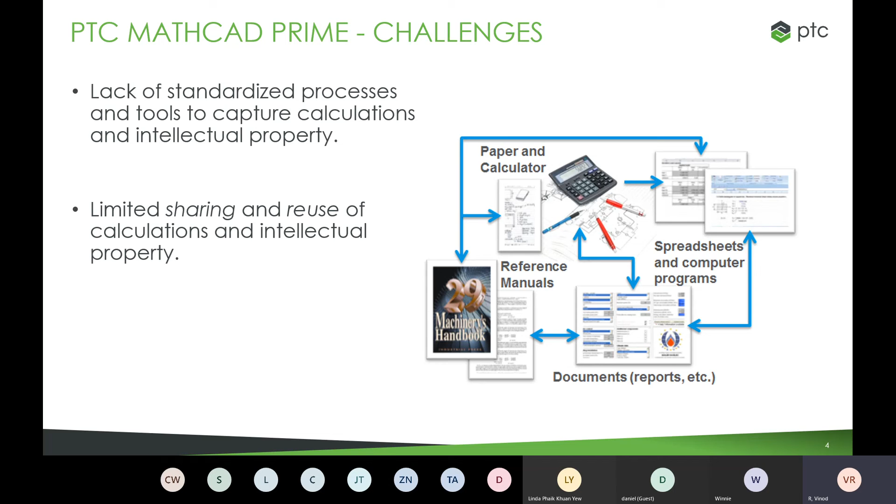And also, errors are very hard to catch when you're working on any programming or defining the problem statement in the backend. If there is something wrong, or if you make a simple mistake, identifying that mistake and where it has gone wrong is a bigger problem today, and it would take a lot of time to catch that problem and sort it out. So that's a bigger challenge today in the market.

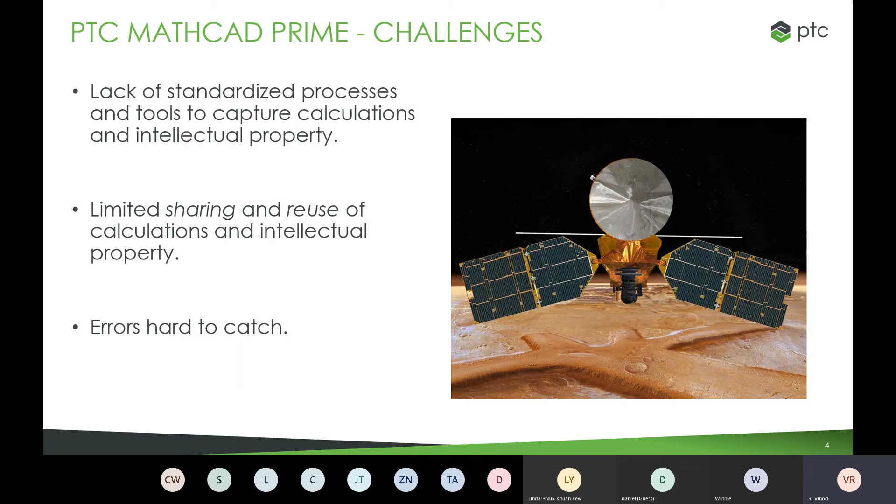So to address all these challenges, PTC came up with a product solution called Mathcad for any engineering calculation, which will help you to analyze your problems, solve them, document them, and also share them with your peers, your colleagues inside an organization, so that it makes it easier for you to help them understand the problem. It's a self-explanatory document. No need to go ahead and explain how things are done, as you would if you were doing it in programming or a spreadsheet or an Excel document.

So first of all, I'll talk about the capabilities. It's a digital engineering notebook to perform your engineering calculations and manage your design intent. So as an engineer, you are not forced to learn a programming language for any engineering problem in order to narrow down to your solution. What PTC offers is a completely whiteboard, intuitive user interface. So you can go ahead and define the problem statement as you do in your notebook or on a piece of paper.

You write your formulas down, define the constraints, then you solve that problem. And as you make any changes or an update, you can see the problem update dynamically. This is how PTC helps you to increase efficiency as well as speed up time to market by using the right solution early in the product development process.

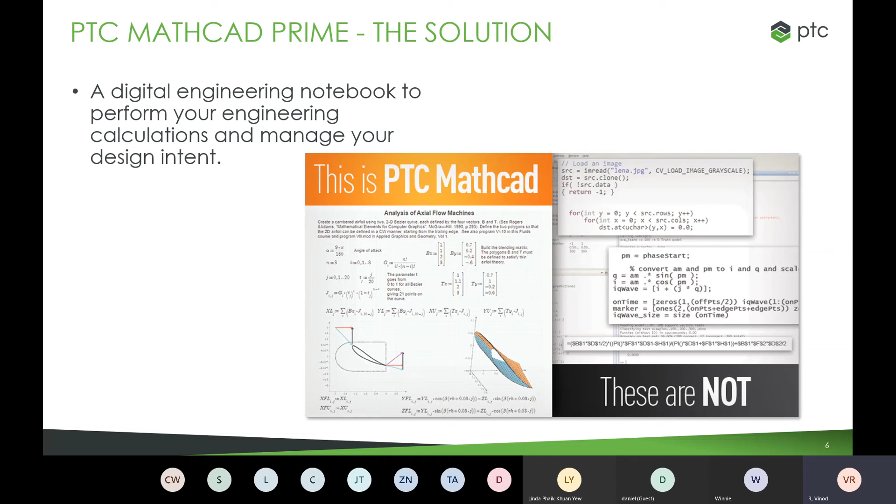So it combines the ease and familiarity of an engineering notebook with a powerful mathematical engine at the back end. And as I said, it's an intuitive as well as easy to use whiteboard with natural math notation. You can see how you go ahead and define what the X value is, what the formula is, everything as you do on a piece of paper or a notebook. So you're not doing any coding or programming, or using any spreadsheet, to bring up the relationship between the two variables.

So it's comprehensive: it combines live math, text, graphics, and programs in a single readable form, and manages units automatically. This is an added advantage. As an engineer, sometimes you might end up using a different unit system, and because of that small error, the entire problem will result in a big mistake.

So if a software helps to guide you, and also gives you feedback whenever you're putting a wrong unit system into a mathematical calculation, that will boost the engineer's confidence level, as well as help them work flexibly, and they can work confidently on a problem statement, knowing that if I make any sort of mistake on the unit system, I have Mathcad, which will highlight that this is not the unit system or variable you are trying to bring into a formula, and this is wrong. So that gives an added advantage when you use our Mathcad.

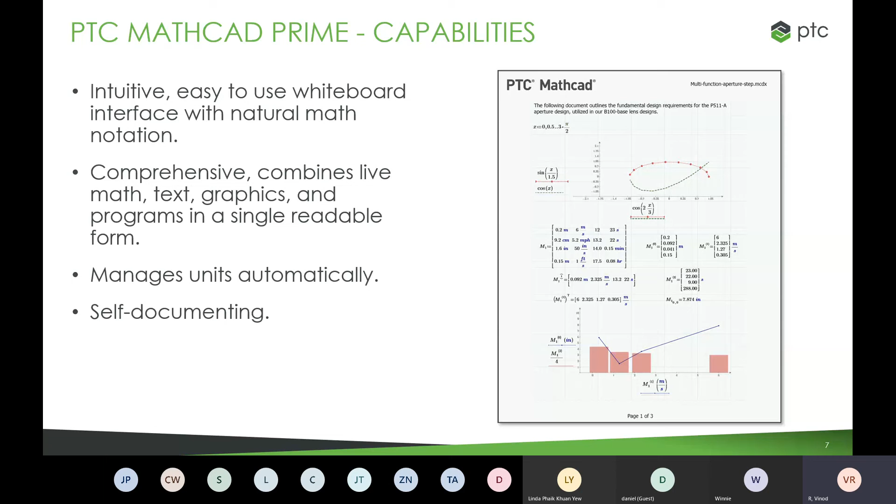As well, it is self-documenting. You define the problem statement and when you export that, whenever you want to share it with your colleague, you can do that within no time. So it's a what-you-see-is-what-you-get editing document, and you have a rich numerical function library. I'll walk you through that in a live demonstration.

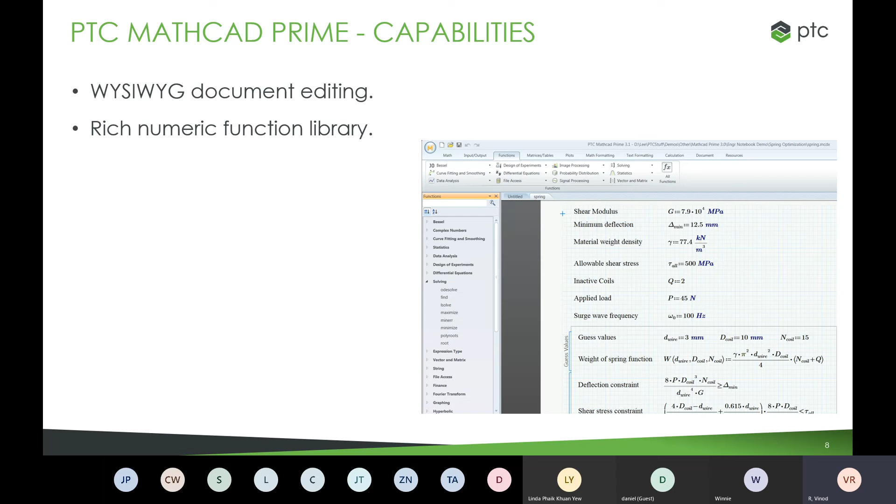You can see how easily I am able to enter any problem statement and write a simple formula for that problem, and calculate it. And if I make any changes, how that result will dynamically update. And for any calculation, you would definitely need to plot XY, polar plots, contour 2D plots or graphs. Those things are made simpler inside our environment.

So I'll also walk you through during the demo how easily you can create or customize a graph or a 3D plot according to your need. If you have any standard templates for your organization, you can also bring in those templates for visualization purposes.

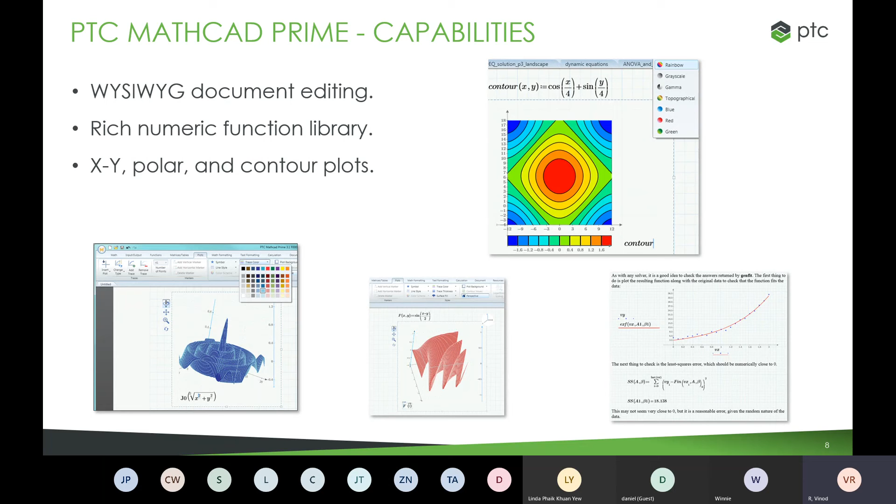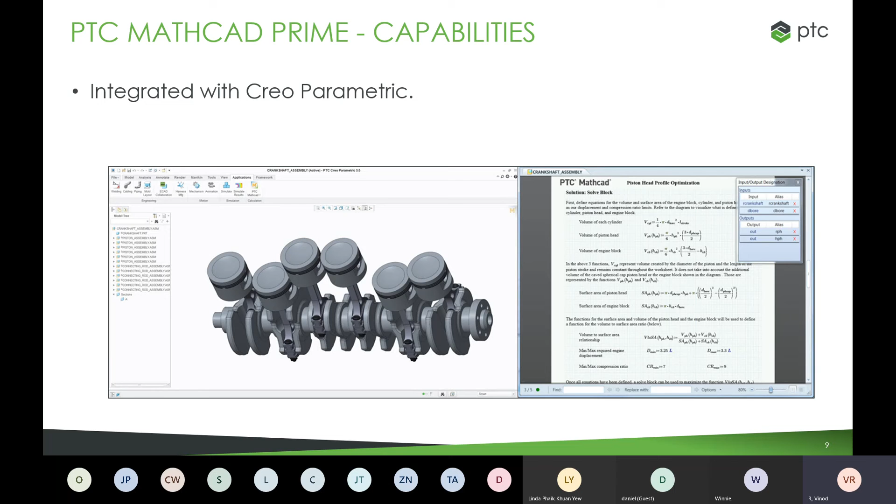And lastly, as an organization, if you are into any 3D design of your product, sorry for that. So as an organization, if you're using any 3D CAD software, creating your CAD model or working on any product design, you can integrate our Mathcad with that environment. What I mean here is that you can always do calculation driven design. That will help ease the work. You document that design intent.

For example, you work on a particular product design for this piston head. You define the parameters, like the diameter and the length, and you can bring that information back into our Mathcad environment. You have that link between a calculation tool and the 3D modeling tool. Once you bring that in, you do different iterations here and fine-tune in order to achieve the goal. It might be the efficiency you're looking for. It might be the output.

So when you say efficiency, you work on multiple iterations, varying the diameter or the length, so that at the end of the day you achieve that efficiency, right? You might find out this is the right diameter and this is the length the piston should be in order to achieve the efficiency you're looking for. Once you know what the value should be, you can bring that value back into the 3D environment, and at a click of a button you can edit that.

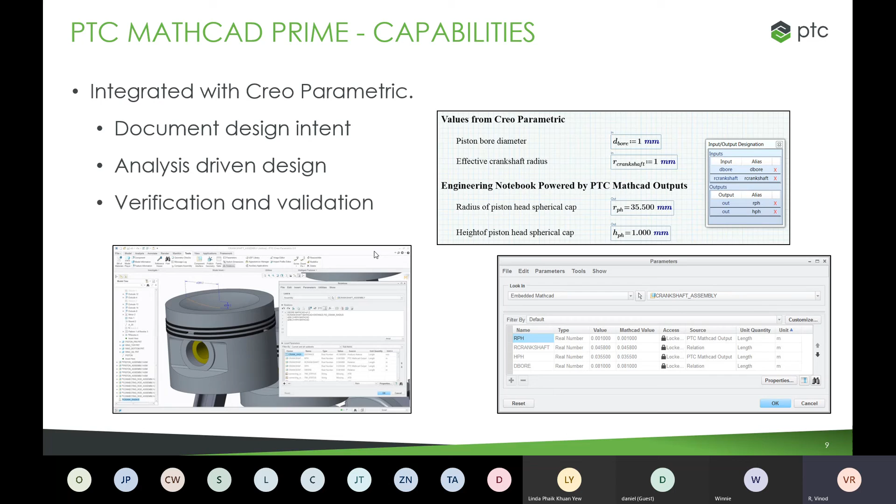You need not start from scratch, as you already brought the values into our Mathcad environment. Then you take them back to our 3D environment. At a click of a button, the entire model is able to regenerate. That's why we call it analysis driven design or calculation driven design. This is also an added advantage for any mechanical engineers out there who want to do calculation driven designs. You can also verify and validate the results you have got. With that said, those are the few functionalities I wanted to highlight before we start the demo.

So I'll quickly switch between the tabs and get into my Mathcad environment. So Winnie, can you just confirm whether you're seeing our Mathcad screen? Yes, Omar. Sorry, yes. No problem. Thanks for that.

Just before I start this live demo, I would like to give you insights on what I'll be talking about. First of all, I'll do two demonstrations so that you have more understanding of what Mathcad is. The first demo is a basic demo. I would like to walk you through how easily you can create a document using our Mathcad, and what functionalities you can use in Mathcad for an engineering calculation.

And in the second demo, I have defined a problem statement and worked on it. I'll walk you through what the problem statement is, how I was able to bring all the related information or formulas into that environment, and how I'm able to calculate the goal I'm trying to achieve. Okay, so that's an insight. So quickly, I'll start the demo here.

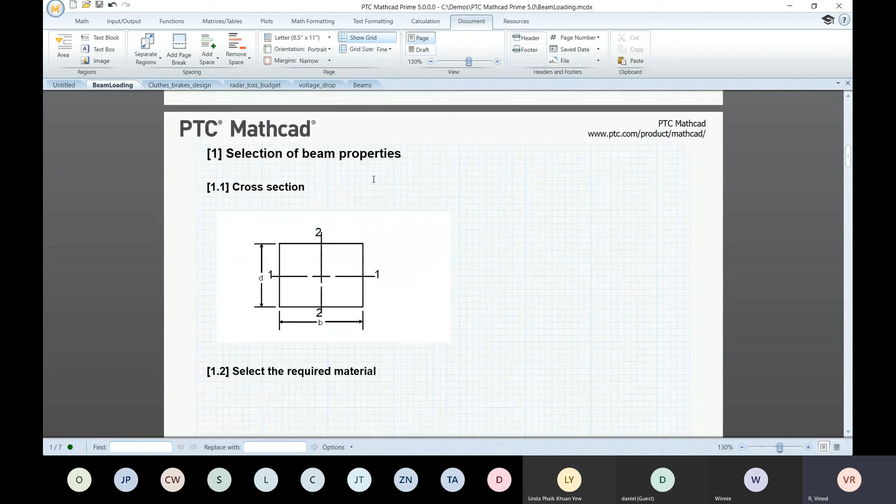And also within Mathcad, it enables engineers to insert embedded objects from external applications, like your Excel document, your PowerPoint information, your PDF, or any other formats which you wanted to bring into our environment. For example, if you see at the left side, I have this image which I have brought in from a PowerPoint. So quickly I can go ahead, double click on that, and edit that information.

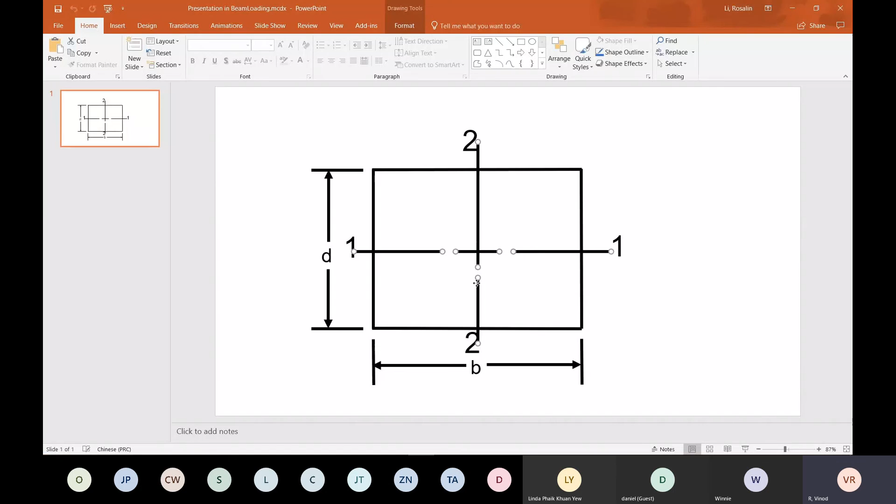So for example, if I do a simple edit, like change the color of this axis here, just for representation purposes for this demo, a simple operation. So let me change this color so that it's an axis there. And this would be updated right back in my Mathcad environment.

So also, as you know, Mathcad uses natural math notations and live calculation. This natural math notation allows engineers to simultaneously solve and document their calculation the way they learned in school. So you can see that I'm defining the values of B and D, and I'm putting forward the calculation formula for that. So this is how easy you can do that. So engineers are not forced here to learn a programming language or a proprietary scripting language. So calculations can be easily understood, verified, validated, and reused.

So I can also go ahead and edit this equation, quickly change the expression of that equation, and you can see that if you make changes, the content, the expression will automatically update. So that is how fast and dynamic it is. And I can also bring in the unit systems there. The hallmark for Mathcad is how the units are managed inside our environment.

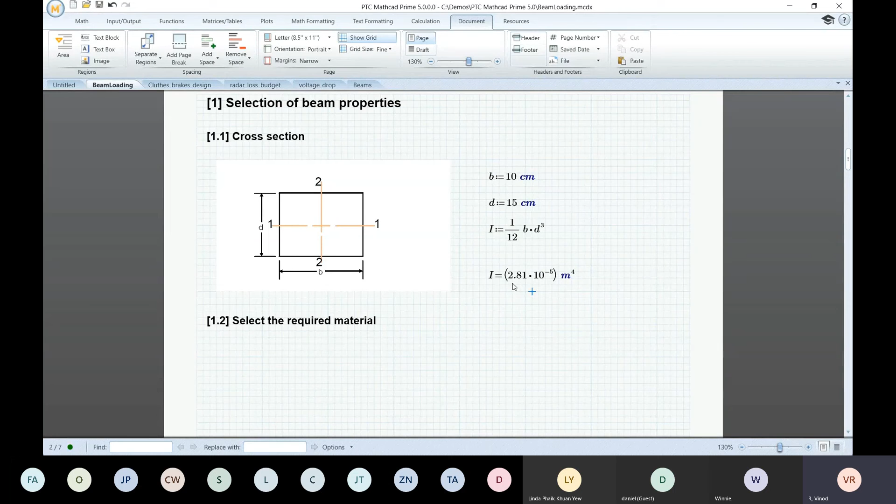So units can be changed easily, and for example, if you attempt to bring incompatible variables or incompatible units into our environment, Mathcad will not allow you to do that. You can see that these units are not compatible. So this gives more flexibility, as well as dynamic support for any engineers, which will help them save time and avoid mistakes in future. You need not go ahead and recorrect the entire problem statement you have done.

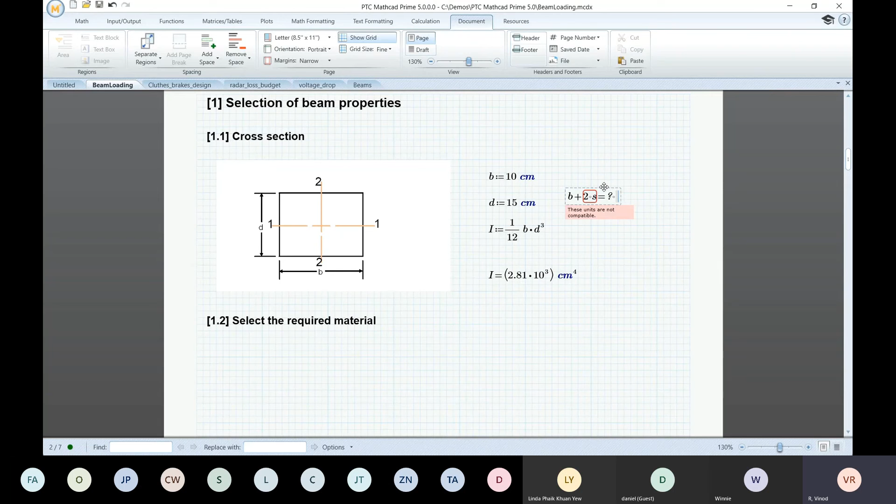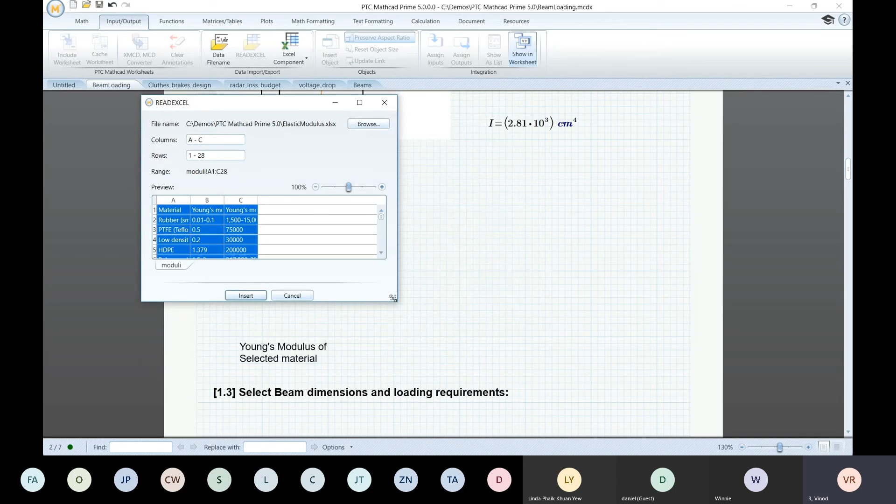As well, PTC Mathcad can also read and write data files such as Excel. So you can see that I'm trying to import an Excel document inside a Mathcad environment. So we are using the read Excel function inside Mathcad to insert an Excel document into a Mathcad environment. So once you do that, if you don't want to bring in all the information inside the document, you can pick and choose how many rows and columns you want to bring in, and you can use that function inside the Mathcad environment.

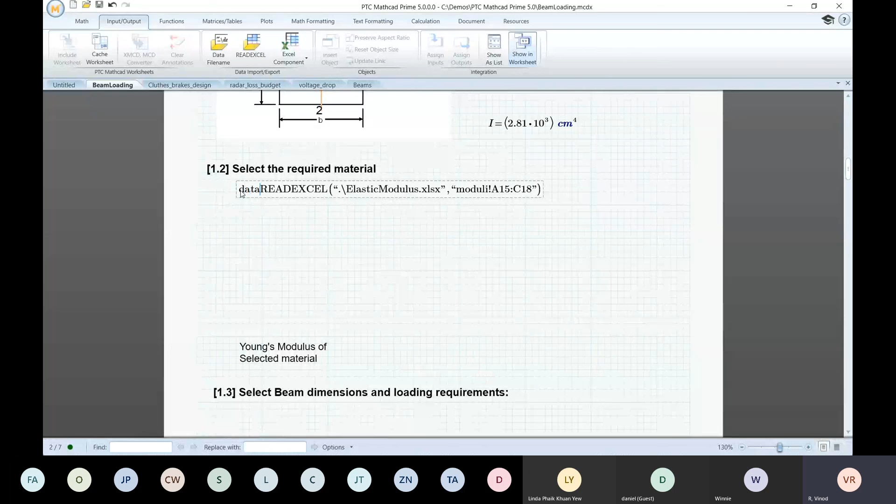So Mathcad contains over 700 built-in functions such as the read Excel function, and if you want to quickly change the different values brought in from an Excel document, you need not import that again from the Excel document. What you can do is quickly change the rows and columns there, and it will update automatically.

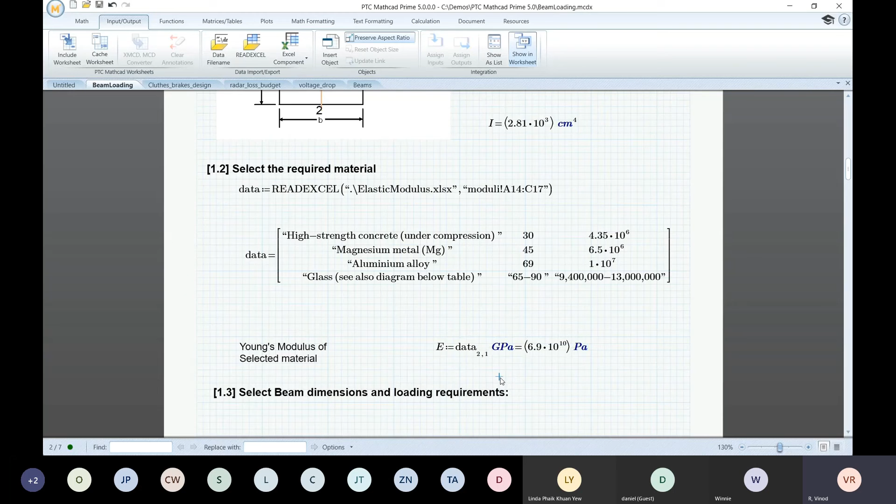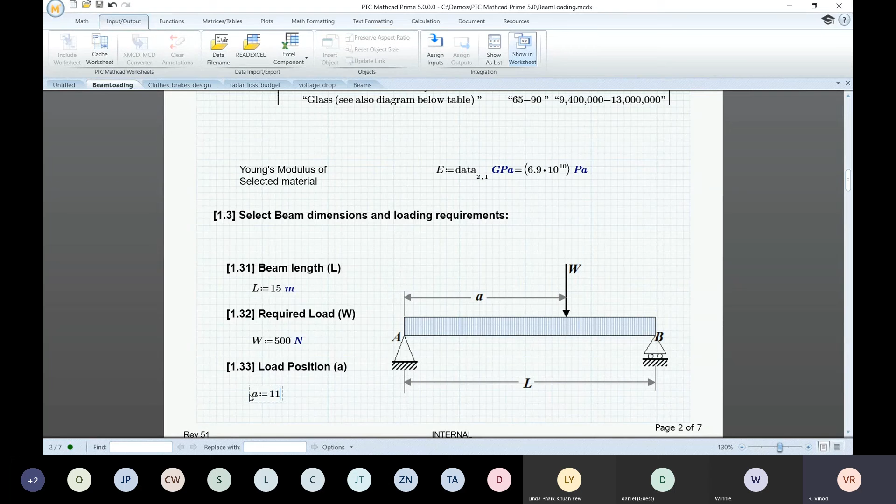So let me go ahead and put forward the equation for Young's modulus of the selected material. What's the formula there? And you can see the results getting updated. And also as a user, you can bring in different defined functions like a y of x function to calculate the deflection of the beam. So I can go ahead and say what is the length of the beam, what is the load acting on it, and what is the distance of the load position from point A, as well as other force balance diagrams.

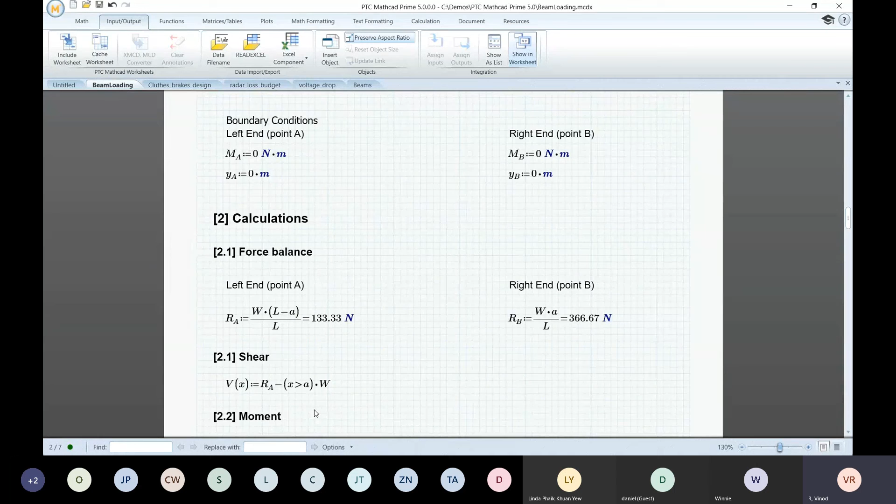This is all I have defined just for the demo purpose, so that we can quickly walk you through the complete capability and how strong Mathcad is in this place. So you can define all the boundary conditions, what is the left end, what is the right end, and force balance equations you can bring in. And more importantly, as I said, you can protect the intellectual property. So this is the deflection formula which I'm using to calculate.

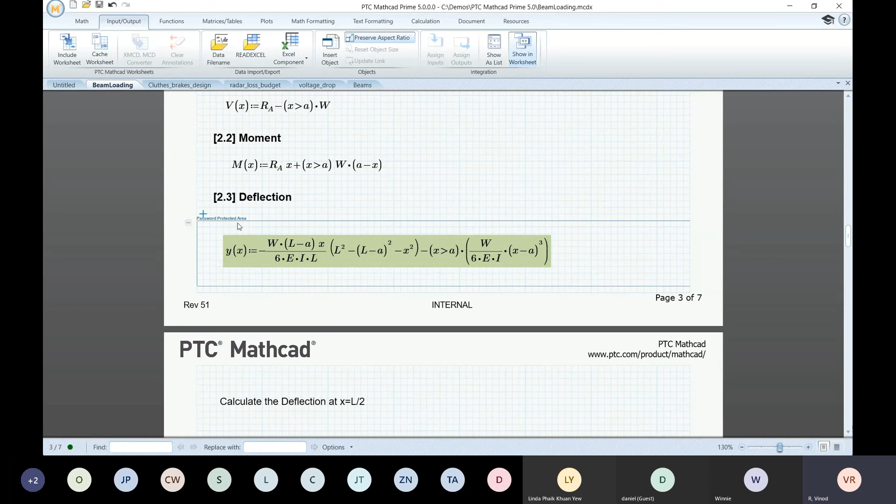And if I feel that I want to protect and secure this formula, in future, if a person who is referring to this document or a person who is completely new to this product by chance makes any mistakes, or goes ahead and edits this formula, then the entire problem statement or problem definition will go wrong. So I don't want to take a risk over there. So I need to protect my intellectual property there, so I can have that password protected area. So a person with the right password can go ahead and edit that formula.

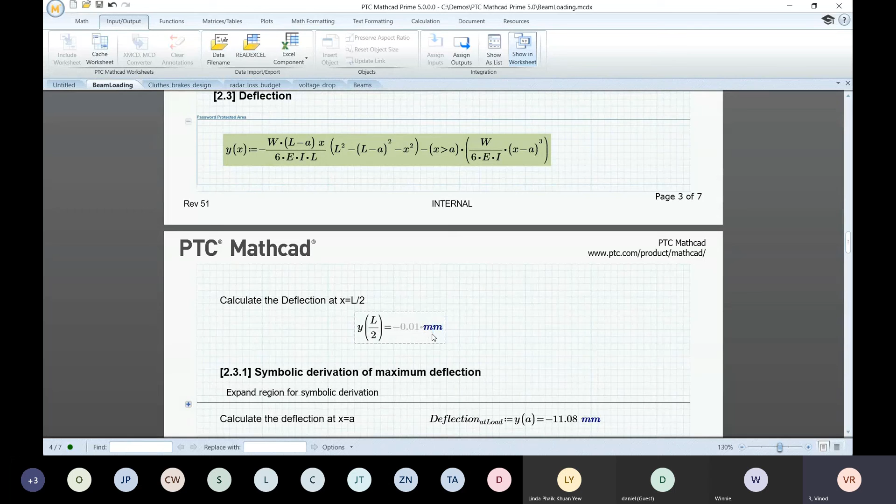So to just calculate the deflection of a beam here, I'm bringing in the equation, and you can see that it's in meter now. I wanted to change that into millimeter. Just change the unit system, and the result will get updated within no time.

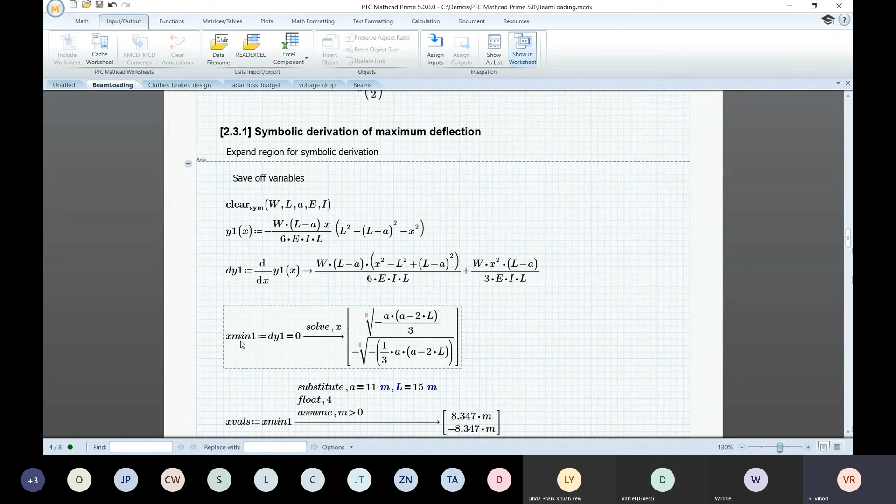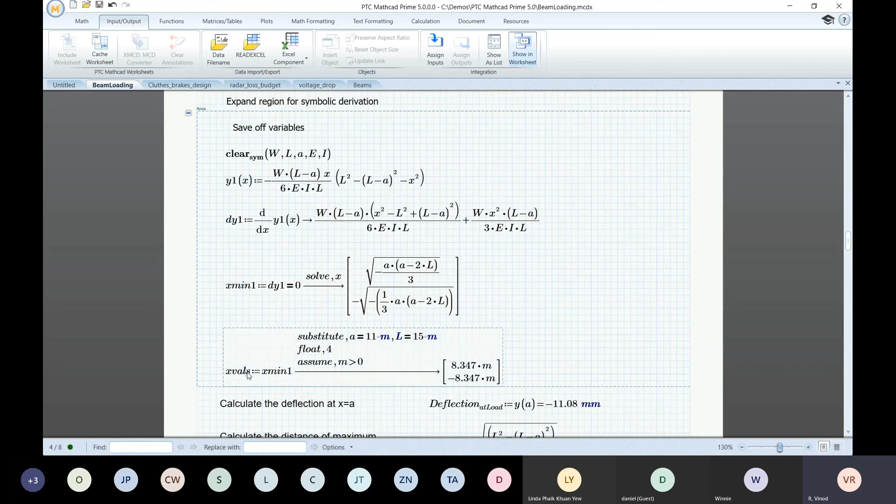So in this expanded area, we can also see some symbolic calculation. This means that we can calculate expressions with variables and symbols and obtain the results in a symbolic form. So unlike numerical evaluation, with symbolic algebraic math we can calculate expressions without assigning values to variables. So symbolic results can reveal relationships among variables that might not be apparent from numerical results, and the calculations are easier to review and understand.

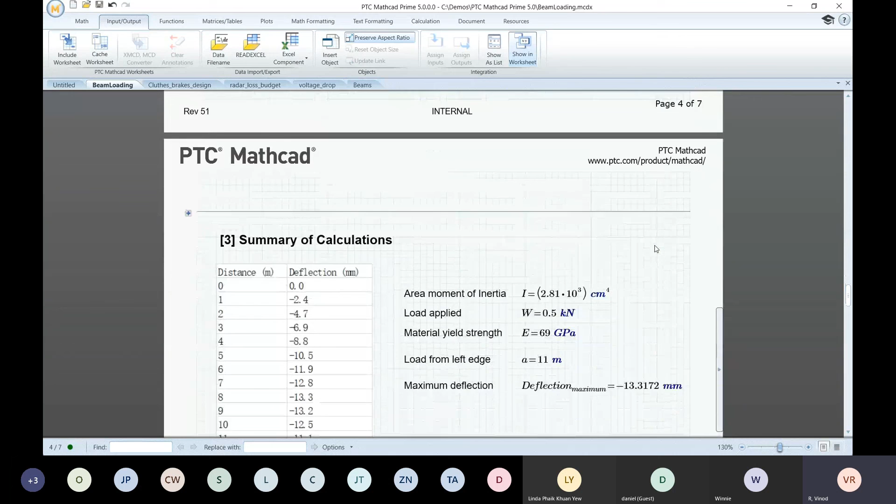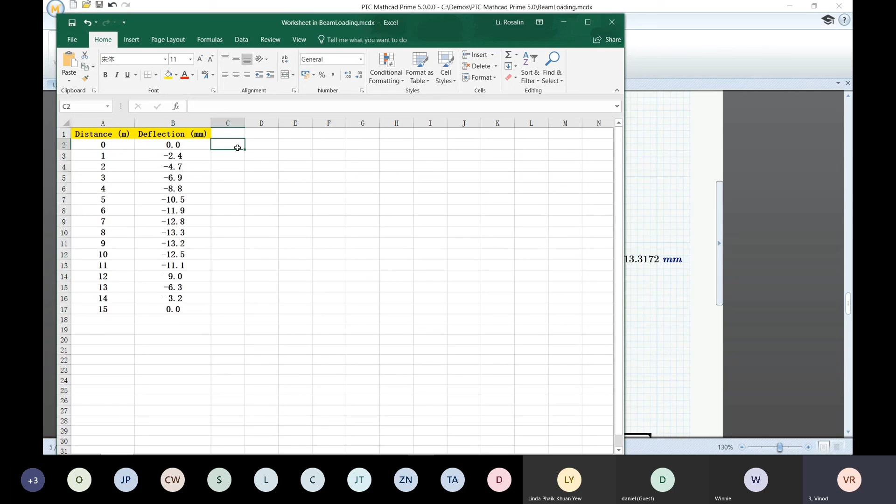So here the deflection again, it's in meter. As I wanted to change that to millimeter, just with a click of a button, I change the unit system, and it changes that into millimeter. So also it's incredibly useful to display resulting data using an Excel object. We have done that here. Notice that I have double clicked on that Excel object and I'm doing slight changes, a simple update of changing the color and changing the font and making it look how I want in a document. So you can go back and see that it has been updated inside our Mathcad environment.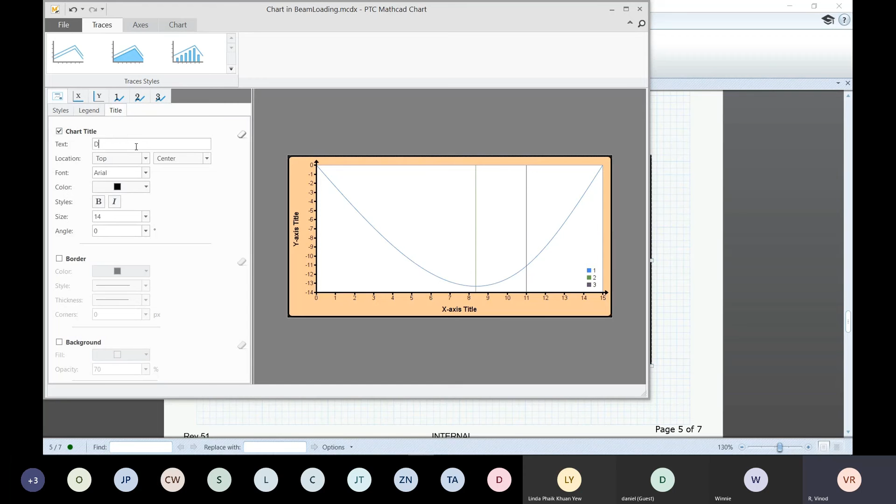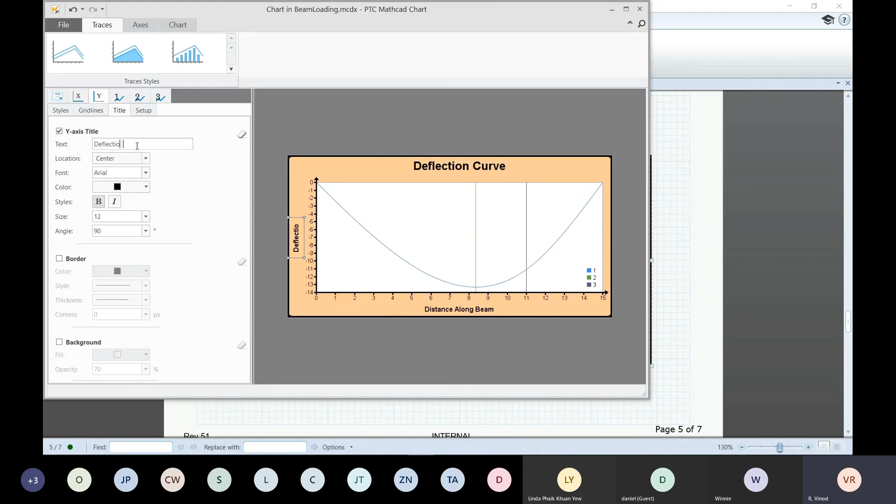So lastly, you can also edit the plots. As per your company standards, you can double click on that and work on the templates, how you want them to look. For example, work on the chart legends and the title. You can go ahead and rename what particular plot you're plotting. So deflection curve is my plot here, and use the basic functions there. How you want to define x, what is x, distance along beam, what is y, deflection, and you can represent that with a different coloring there.

So we are making the interface more user friendly, so that at the end of the day, an engineer who wants to customize the template according to his company standard can go ahead and do that. It's not that we have certain standard color coding that only you have to use. If you want to reuse this in any PowerPoint for a presentation, you can pick and choose your company template color coding, and you can go ahead and do that. That's made easier inside the Mathcad environment.

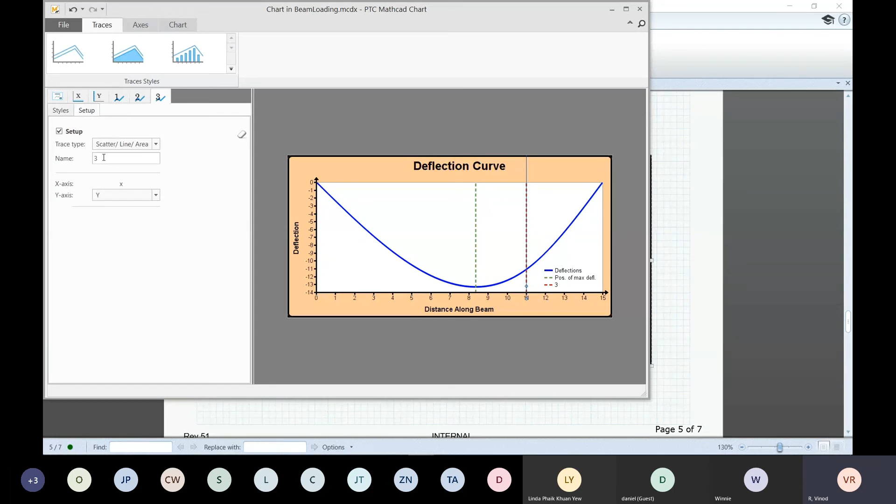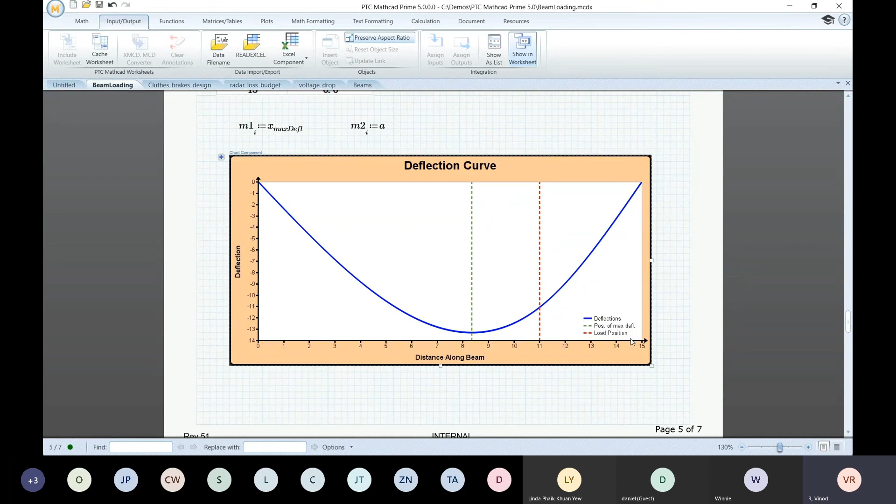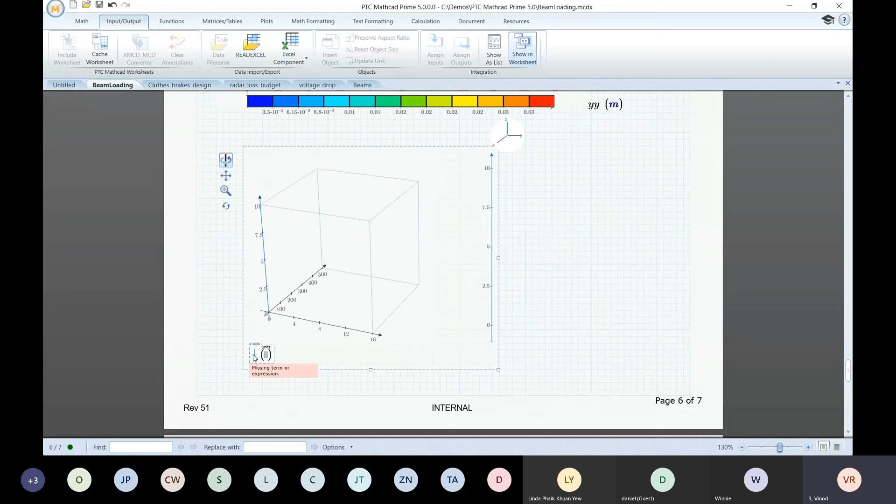So this is with respect to a 2D simple graph, which I tried to plot with all the deflections. You can also go ahead and plot contour plots as well as 3D plots. So for example here, let me go ahead and use a 3D plot to visualize a function of two variables, a vector valued function or a 3D data set. So we can plot surfaces whose nodes are connected into a mesh, curves in 3D space and scattered data points. You can spin, pan, zoom, to visualize and interact with that 3D plot to understand more.

So with that said, this is a simple demo, just a basic demo. I just wanted to walk you through how simple it is to define a problem statement inside Mathcad and go ahead and bring in all the formulas you want and how you want to calculate. You saw how easily you were able to dynamically edit and change the unit systems, and the results are updated within no time.

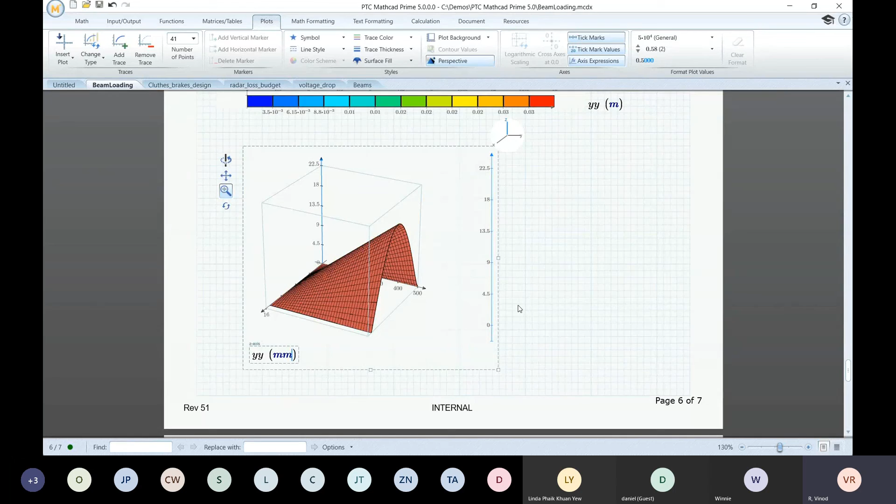So the next demo which I would like to walk you through here is a specific template which I've created. Let me reshare the screen. Just give me a minute, I'll reshare my screen here.

Yeah, so I hope you can see the screen now on the engine. So the goal here is that, as an engineer, I wanted to maximize the ratio between volume and surface area to increase the overall efficiency of the engine. So this is a problem statement. So for that, what are all the information, how I would do? I've created a template and I'll be walking you through with that.

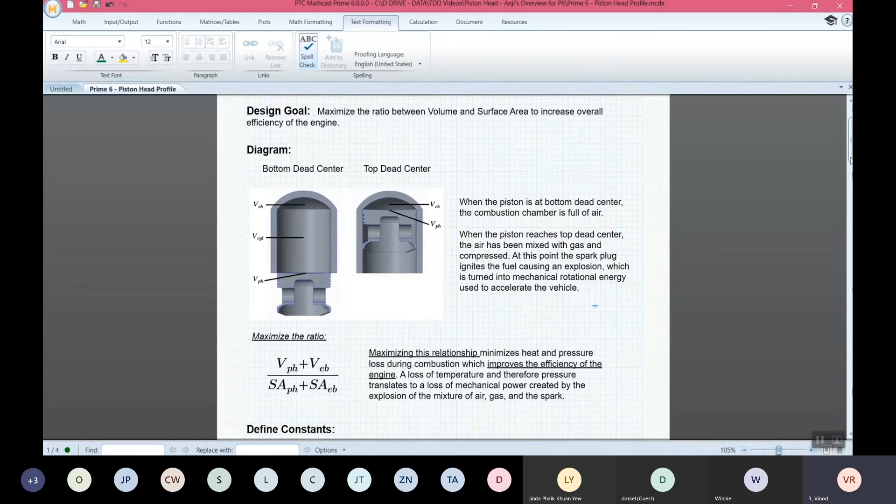So you can see that we have a diagram which I've brought in, which will help you to understand the bottom dead center and the top dead center of that. And also the maximizing the ratio, the formula which is more important for this. So how I wanted to do that, I'm going to go ahead and highlight that. That's my goal. And the statement I have defined next to it: maximizing this relationship will minimize the heat and pressure loss during the combustion, which improves the efficiency of the engine. So that's the whole idea of my problem.

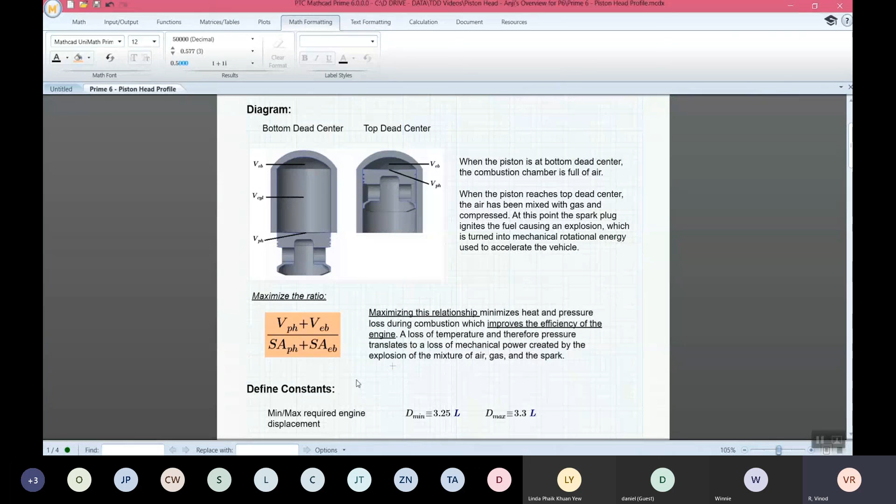So once you have that, you wanted to define the constants, right? For any problem, you have some constants. You need to go ahead and define that constant and say that this is the constant for the entire problem. If you go ahead and mention D minimum, displacement minimum, that will take that value. So this is constant. So the minimum and maximum displacement of engine, what is the compression ratio of that engine? So this is termed as constant, which I wanted to use for this entire calculation.

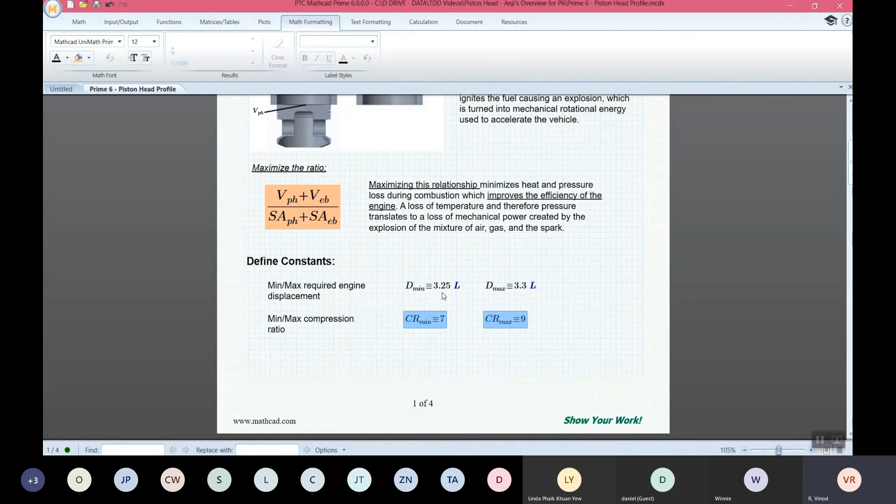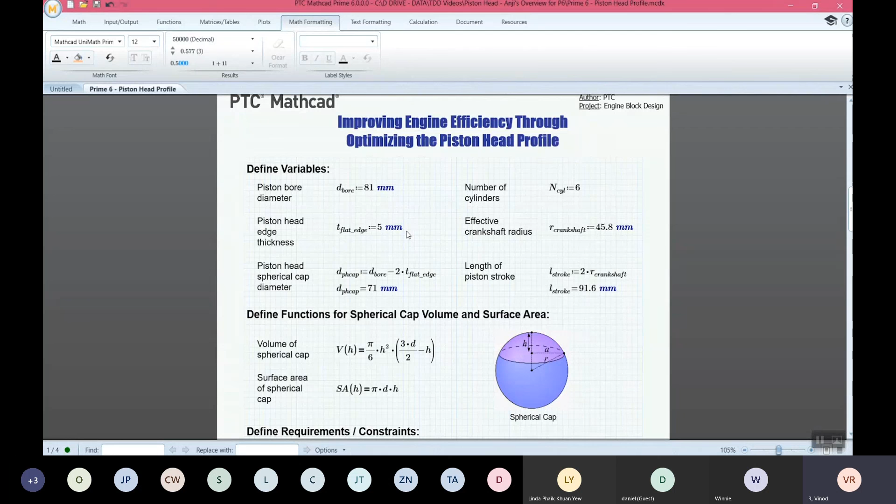And also there are different variables. You wanted to define the variables, right? What is piston bore diameter? What is piston edge thickness? You define that along with the unit systems. So what is the unit you are using for this formula? So you go ahead and define the variables for that particular problem, and also functions for a spherical cap volume and surface area. So this is all the data which I would have referred from a machine handbook or from different designs. So I can bring that data back into the Mathcad environment, how you do it on a notebook or on a sheet of paper.

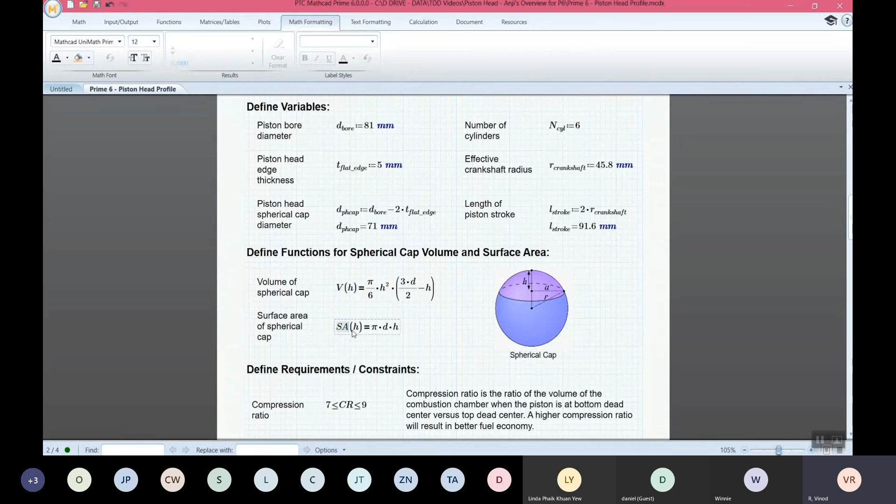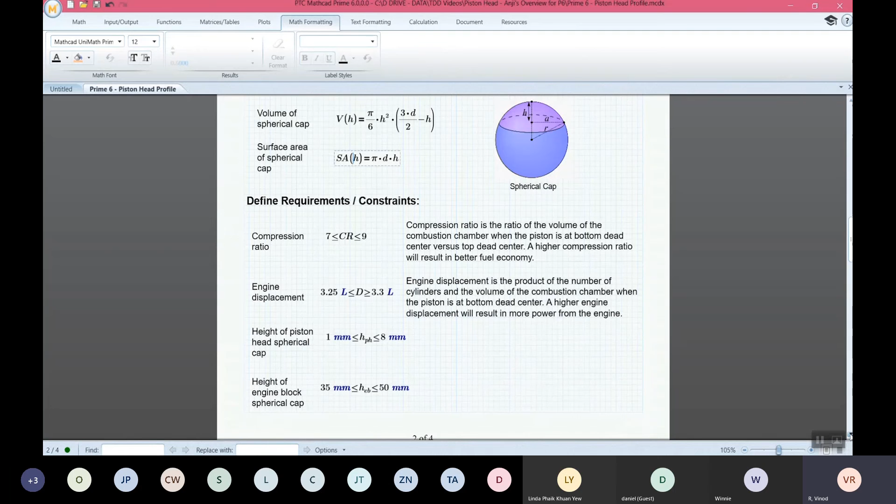You see that I've defined the volume of spherical cap, surface area of a spherical cap. So if you closely observe, I'm not using any programming language or any hard different language. It's completely ease of use and intuitive user interface. I'm trying to just use the basic functionalities. I'm trying to type and bring in the values there.

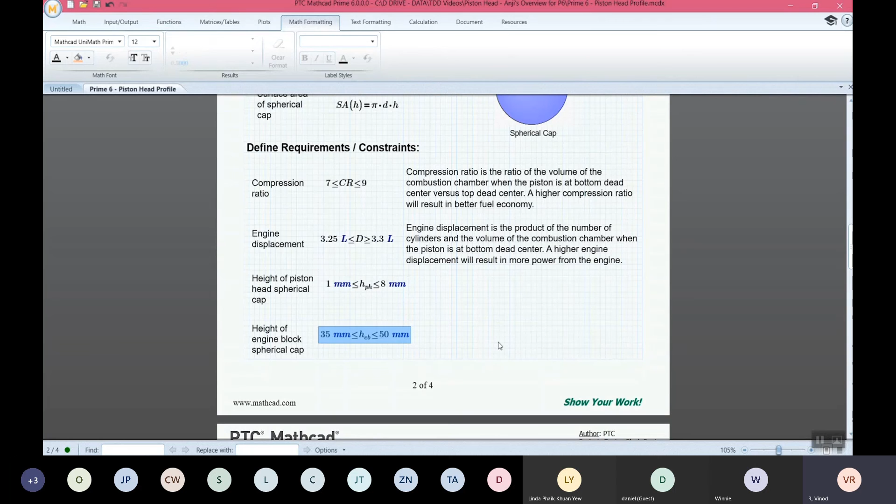So I also have some constraints for this problem. So what are the constraints I've defined? The compression ratio should be within 7 to 9. And the engine displacement should be between 3.25 to 3.3. These are all my constraints which I have to adhere to, and I have to achieve the goal I was looking for.

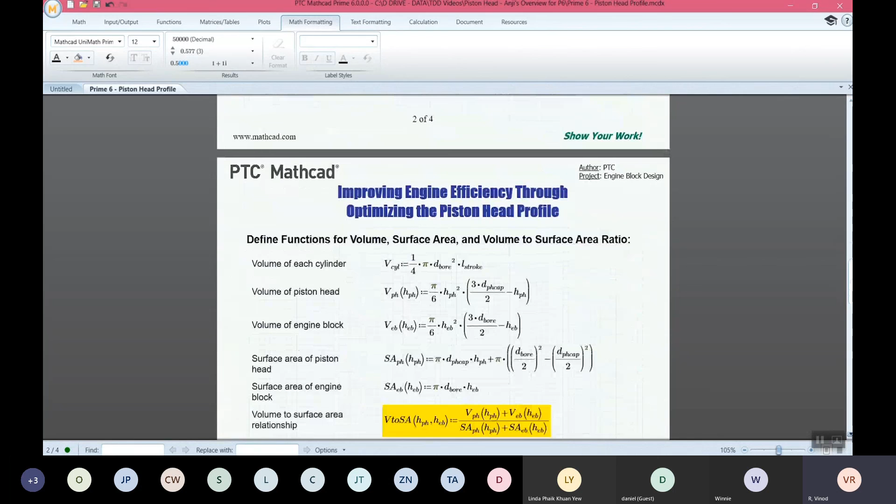So finally, I come up with the formulas for that. So how do you derive that? What are all the basic formulas you had derived? Along with that, you can go ahead and define. As I said in the previous demo also, it's not that you just go ahead and define the values. You can go ahead and define the formulas and derive an equation out of it, so that in future, if a person is referring to this document, he can understand how you ended up calculating this, what are all the formulas you have used, what is the backing, how you pursued this.

So it's a self-explanatory document. You can see that any person who's going through this can understand how you have derived this equation. What is the volume to surface area relationship? What are all the formulas you have used to derive that? So that is what I was talking about, how easily you can do it. So you can see height of piston head to height of engine block. In order to have that volume to surface area relationship, I have derived it from the formula.

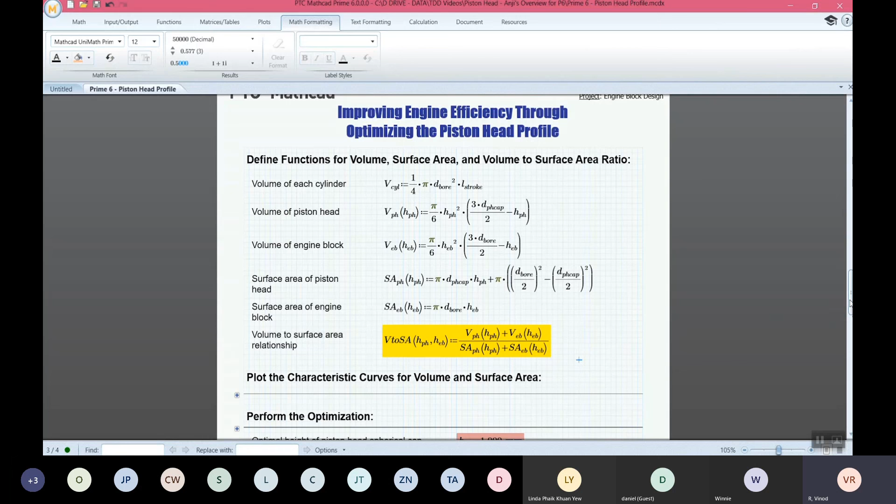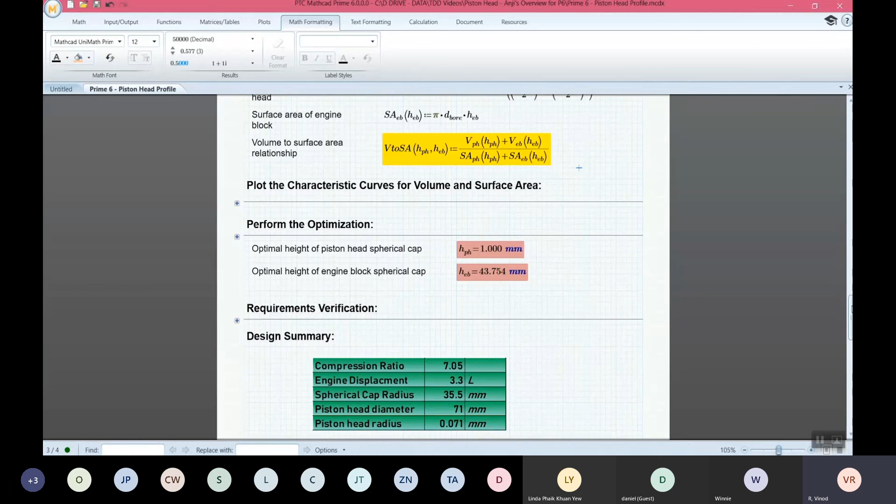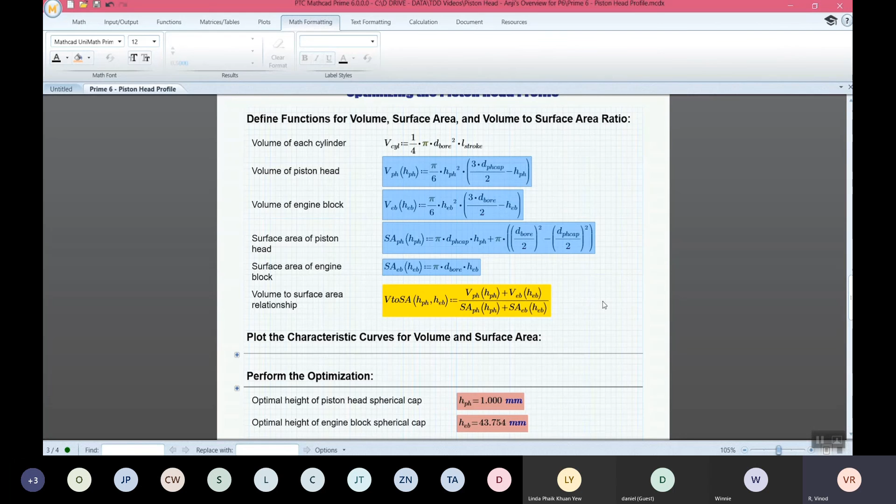And I can also plot characteristic curves for volume and surface area. So what I can do is use the formulas which I've used here for volume of each cylinder, volume of piston head, volume of engine block. I can give a value to that and I can plot and see a graph for these particular formulas I have used. So I've done that. Let me go ahead and expand that area here, plot the characteristic curves for volume and surface area. So let me go ahead and expand it. Yeah.

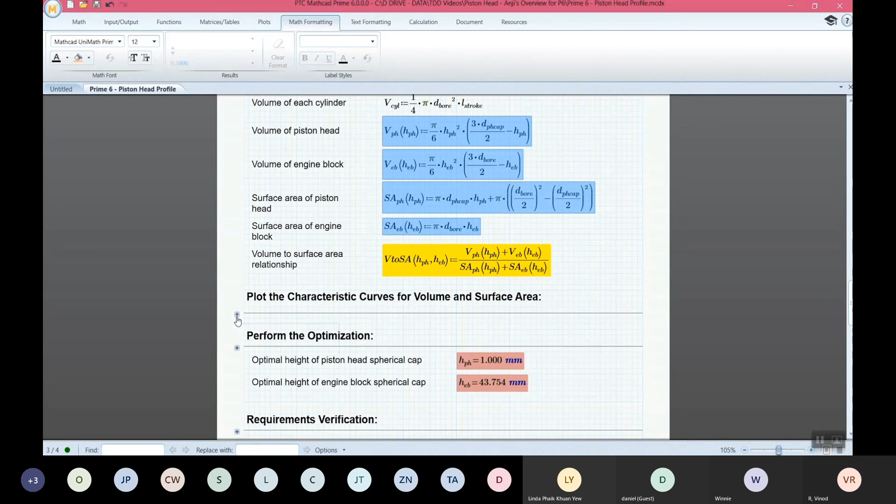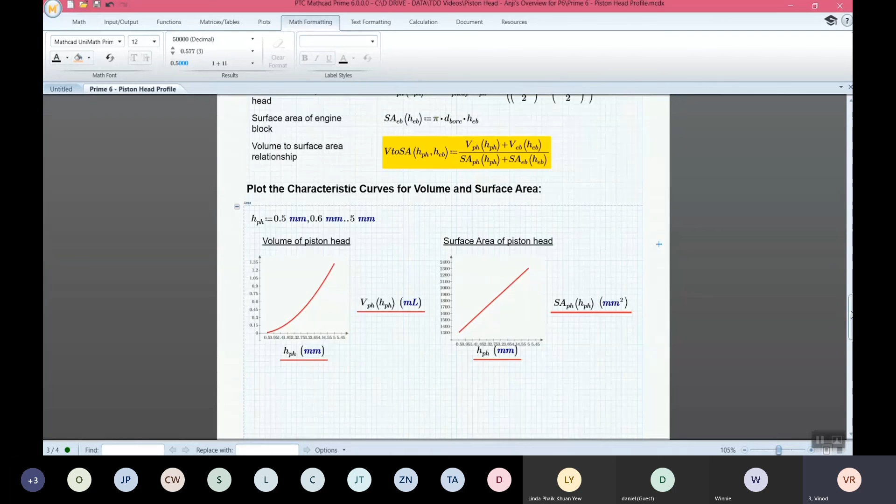So for that particular formula, I've also given what is the height of the piston, and I've defined the value there. With respect to that, you can see that it's plotting a graph over there with these respective values.

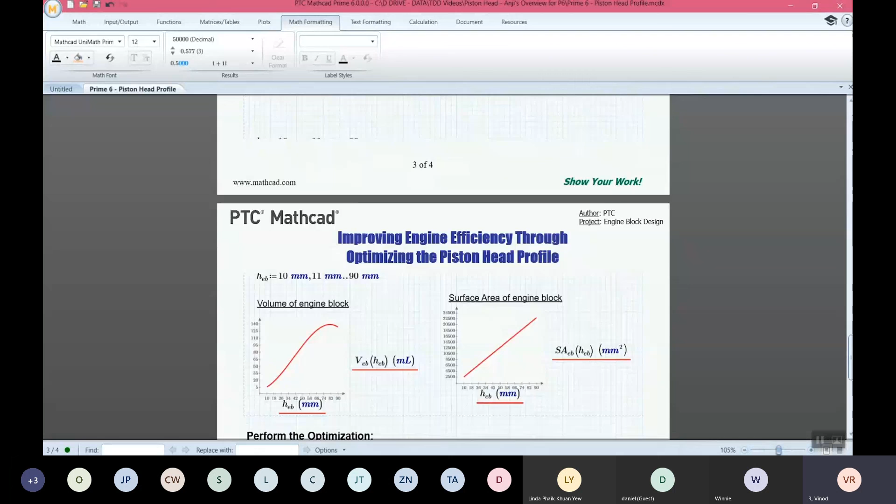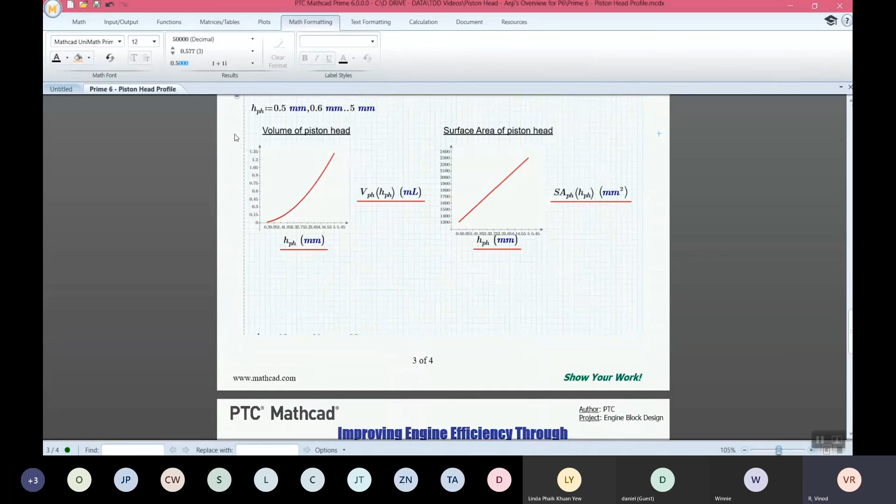So end of the day, you're using the same formulas and plotting the graphs along with it. You can see that for performing any optimization, these are the formulas I've been using. So this is my goal.

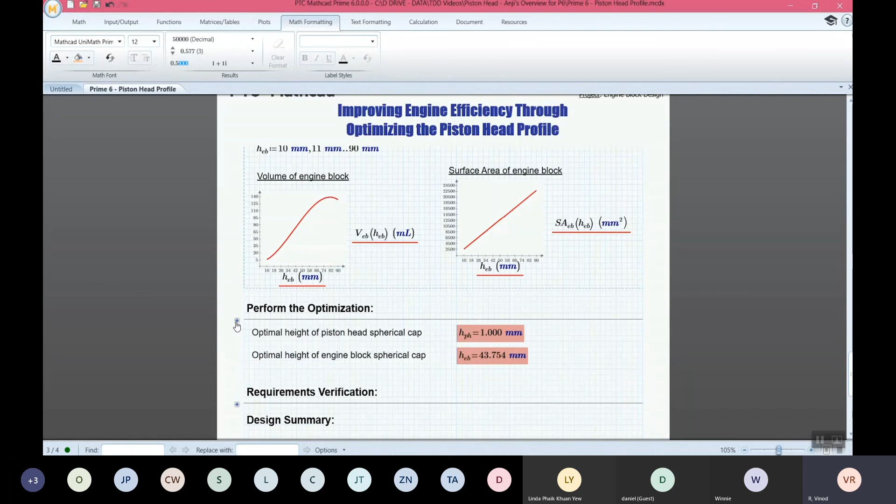Perform that optimization. You can see that I can go ahead and have that password protected area for this particular optimization study. You can go ahead and protect that area. This is more important in this particular problem statement — if this has been edited or if there are any changes to this, the entire thing goes on a toss. So you can go ahead and protect that.

What is that? You can see the formulas I've used for calculating this — height of piston head to height of engine block, the maximum volume to surface area, in order to maximize that, so that end of the day I'll be able to increase that efficiency.

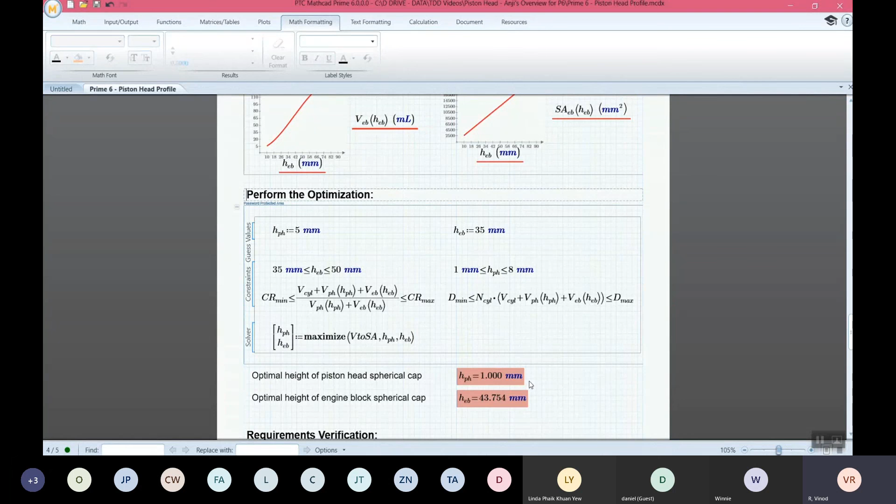So the optimal height of the piston head spherical cap is this much, and the optimal height of the engine block for a spherical cap should be 43.754 mm. That's the value we ended up getting for this problem statement.

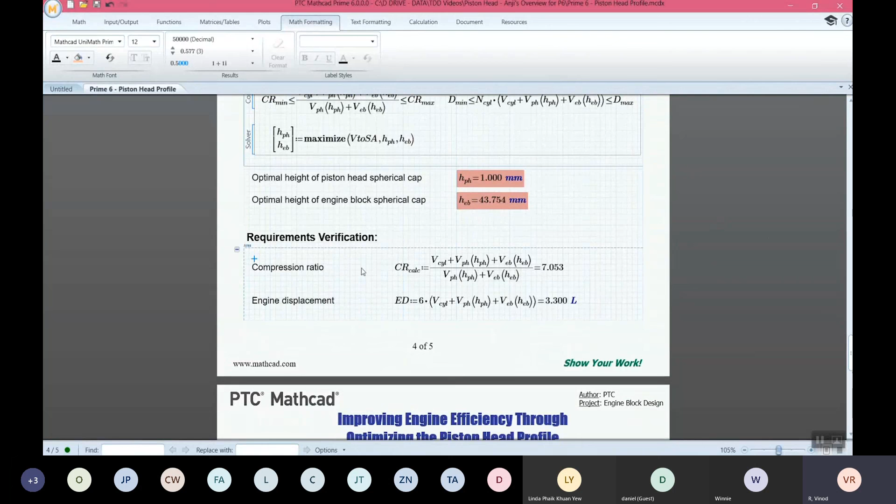And I can also have that requirement verification done there. And you can use this data and put it into an Excel document. You can change that.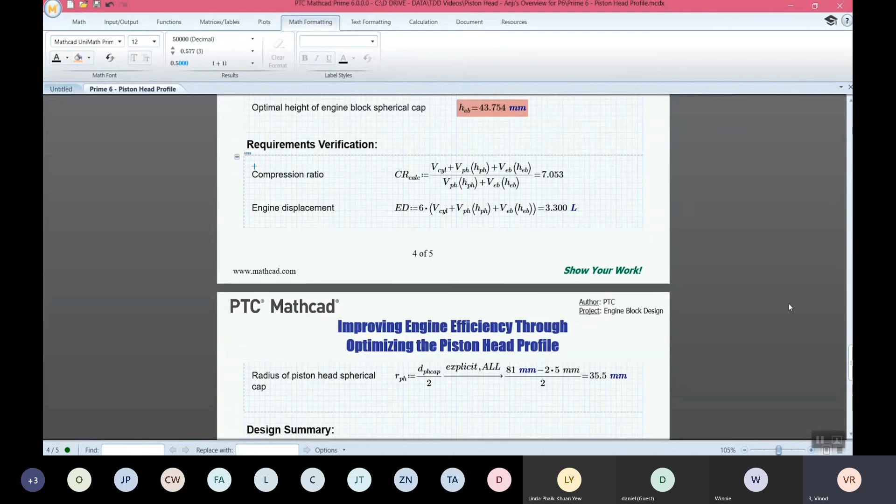So here you go — you see that design summary, the values you got from the calculation. You can use that in an Excel document. So I double click and go ahead and see that. I can go ahead and edit in an Excel document and come back to our environment.

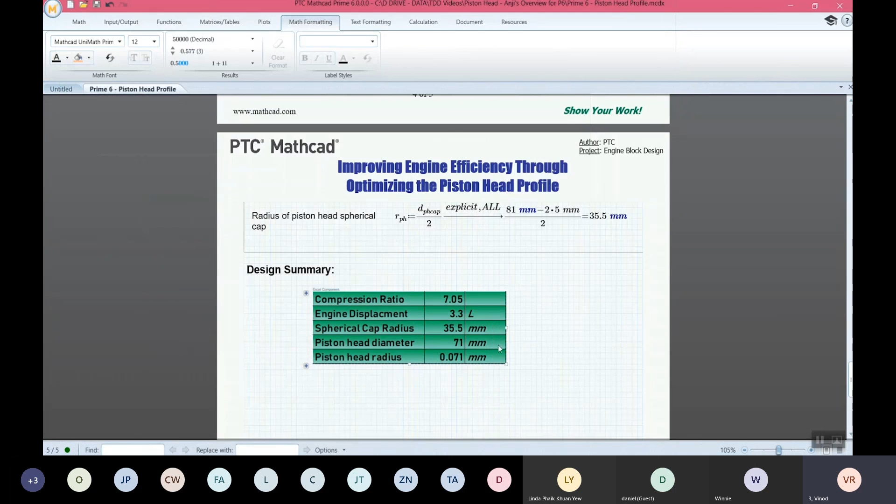As simple as that. Also, if in future someone is referring to this document and wants to understand how I narrowed this down, like what formulas I used, where I referred these formulas, how to derive this equation and solve this problem, what you can do is quickly add some reference documents or links you wanted to put into this document. So I can go ahead and click on text block.

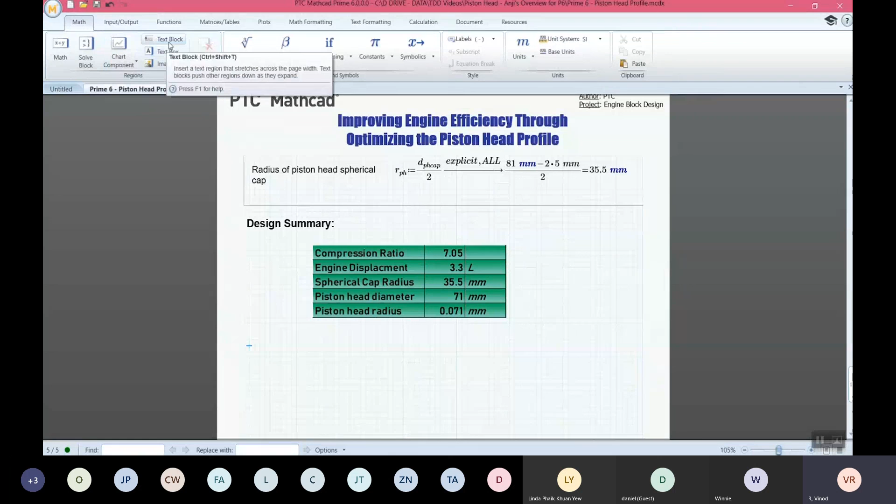I can say that this is a reference book which I've used for bringing up this equation inside our environment. So the reference might be something I browsed inside the browser — I would have used calculation formulas from this website. So I'm going ahead and putting that as a reference here, so that in future someone referring this document can understand where I brought in and referred the formulas, and that I'm reusing that for this particular problem.

So I can go ahead and link that address. Anyone who's clicking on this document can divert to a browser environment.

So with that said, you can see how easily I was able to define the beginning of a problem statement, also an existing problem. As a layman, as a newcomer to our environment, you can see how easily I can understand what this problem is — improving engine efficiency through optimizing the piston head profile.

So you can see what all things I have done, what my colleague who worked on this prior to me spread in this Mathcad document. You can easily understand the clearly defined variables, constraints, constants, and the formulas used, as well as the graphs plotted. This makes it easier for any engineer and saves time instead of going ahead and learning a different programming language to do any analysis, bring in equations, or calculate that.

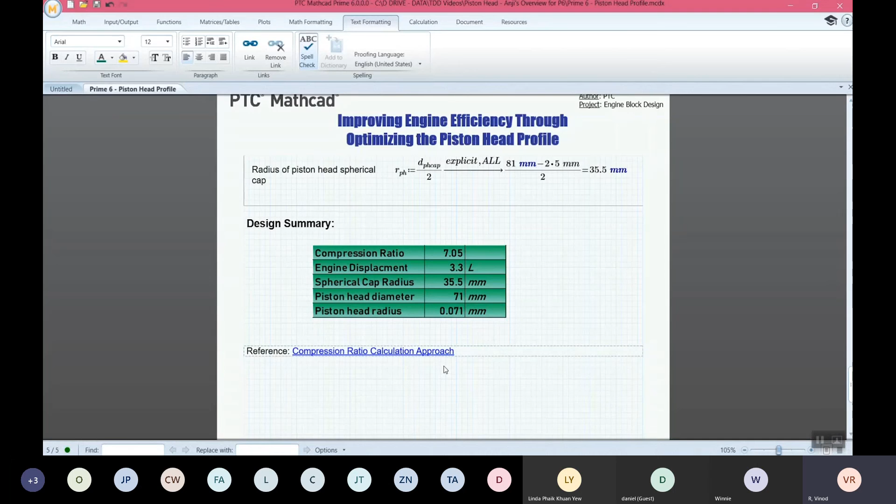So with that said, I'll move back to the slides. End of the day, by using our Mathcad, you would be able to prevent loss of IP and improve knowledge capture. By using password protection, you can go ahead and protect the areas you feel are very important — if that has been edited or tampered with, the entire thing will go on a toss. You can have that password protected, and you can optimize critical design and engineering processes.

For example, if you are using a calculation-driven or analysis-driven design, you can have that link. As you saw, the final length and diameter I got, I can reuse that value back into my CAD environment, and at the click of a button my design would be able to update within no time. So once that is updated, as a design engineer, your job is made easier.

You need not go ahead and double click on that particular parameter and edit it every time you do any different iterations or things like that.

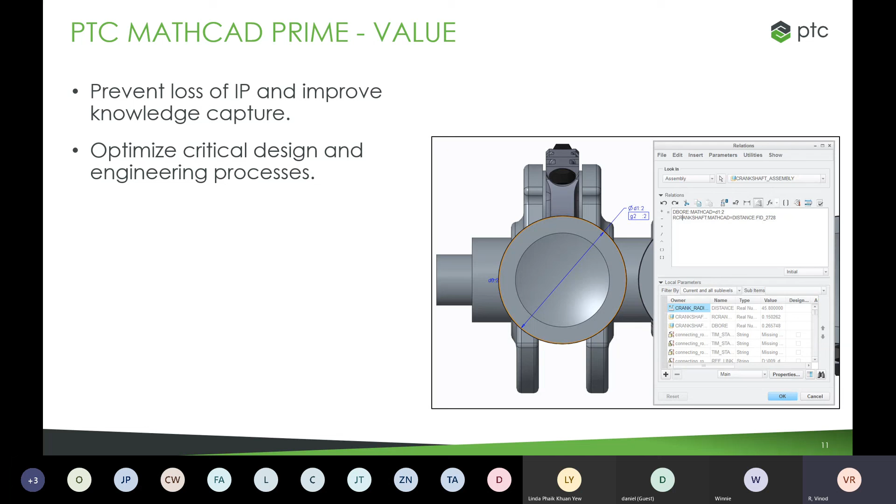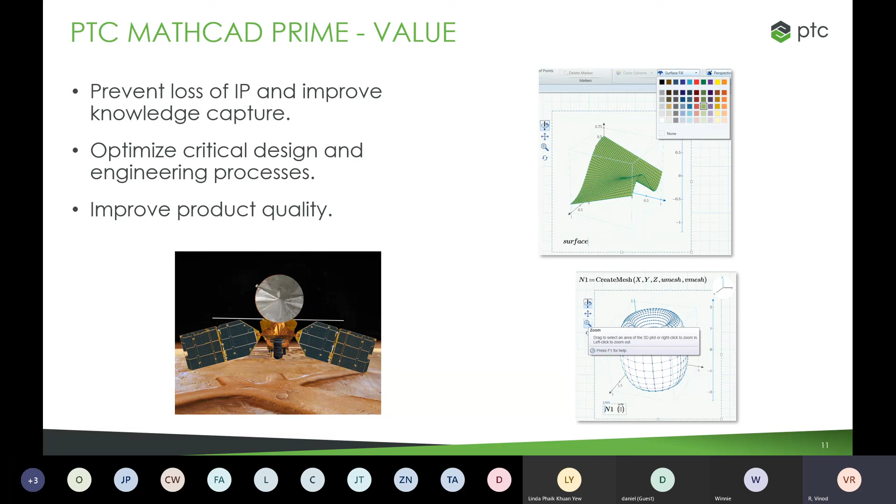And lastly, you improve your product quality. That is more important, right? End of the day, any engineer who is working on any product design wants a better quality of product that, when it goes to market, has to withstand and perform well with respect to its competitive products in the market.

And speed up time to market. This is more important than the traditional way of doing it, like using a different spreadsheet or document. If you do any editing, or wanted to reuse that document, or identify a problem or error you made, it would take a lot of time. But doing it in a simple document, easy to read, easy to use, with an intuitive user interface, will help you speed up time to market.

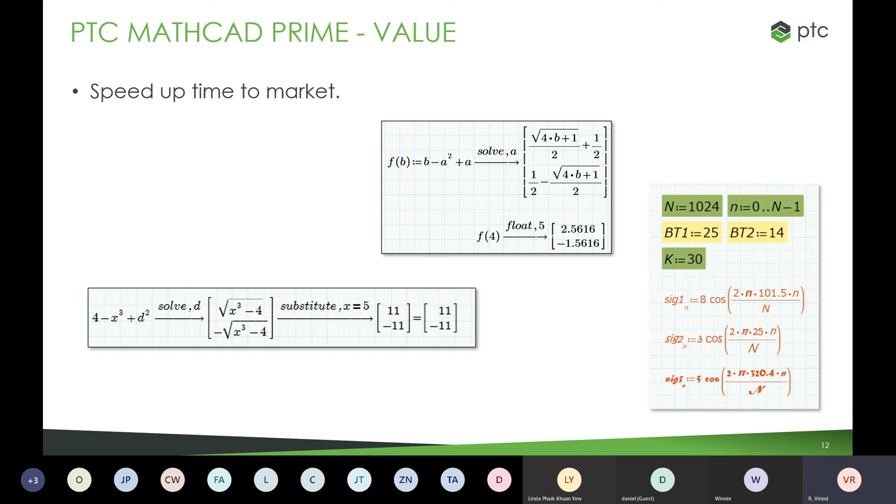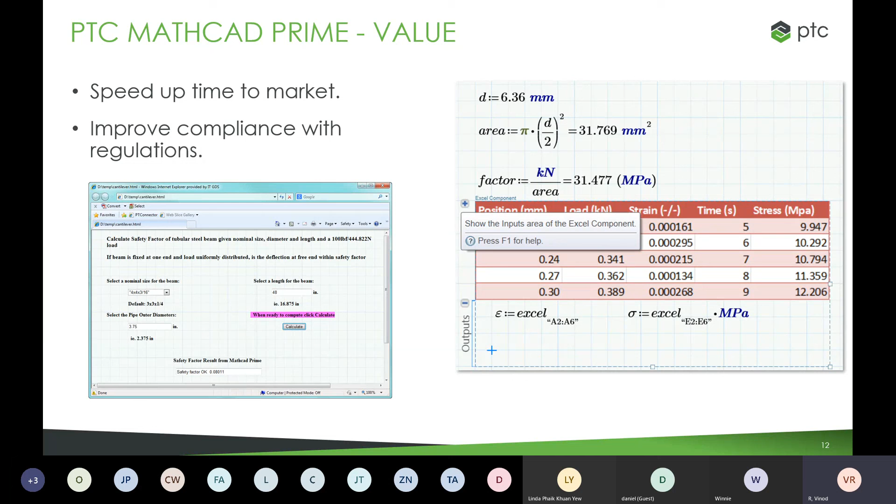End of the day, it's a win-win situation. It also improves compliance with regulations. So if you wanted yes or no kind of answers, like whether it passes a test or not, all those things can also be done inside our environment.

First we'll see what ZF Wind Power is, then I'll walk you through what their problem or initiative was and how they addressed it using our Mathcad. ZF Wind Power is a globally established designer, manufacturer, and supplier of reliable, custom-built gearboxes for multi-megawatt wind turbines, with a power capacity ranging from 1.5 to 6.15 megawatts.

A senior technology engineer felt the impact of using PTC Mathcad in daily life, saying: I have been doing things with PTC Mathcad that people said could not have been done.

The initiative ZF Wind Power initially had was that they needed to reduce repetitious work and leave the team focused on engineering problems. When they say repetitive work, they mean when working on multiple iterations, they didn't want to go back and redo changes, or spend a lot of time identifying where a problem went wrong.

So they wanted to replace that with a straightforward, easy, understandable way of defining a problem statement and solving it, so that their engineering team could be more focused on engineering problems rather than finding mistakes or doing repetitive work.

They also wanted to improve accuracy and repeatability of complicated calculations and minimize tedious programming tasks. Earlier they were using different tools for that, and they wanted to minimize that programming requirement, as well as create and modify complex model geometry efficiently, and automate data and workflow management.

So those were the initiatives they had, and here's what PTC helped them with. The solution we offered was for engineering calculation, that's our PTC Mathcad, followed by 3D design, our PTC Creo, as well as a data management tool, Windchill. It's a suite of solutions we offered so they could overcome and address the challenges they faced during product design.

With PTC Mathcad specifically, the calculations are developed once, saved in worksheets, and reused. You saw the template I showed you that I saved for a particular problem on engine efficiency. Likewise, you can create different worksheets and save them. Whenever you want to reuse them or do a different iteration, just go ahead and change the values, and the results will get automatically updated in no time.

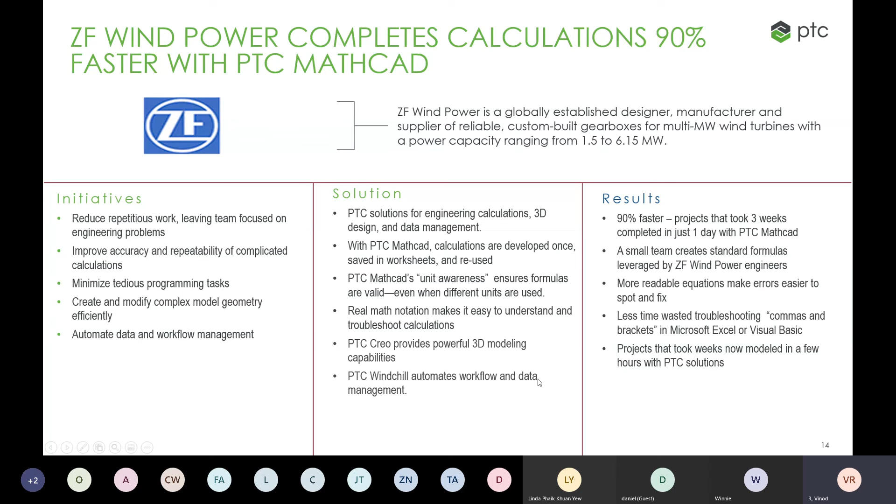So with that said, this is what I wanted to walk you through with our engineering calculation solution, PTC Mathcad, which will help you address day-to-day challenges, as well as fix up a standardized process for how you can achieve and make use of and get benefited from our solution, so that end of the day you reach market at a faster rate, provide the quality of product expected by your customer, and gain credibility so that you sustain in the market for a longer time. So it's a win-win situation for both of us.